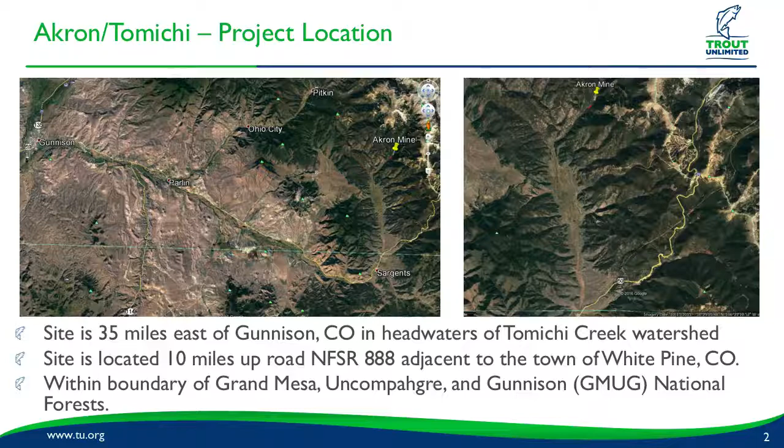A little bit zoomed in version of the site. Again, if you're familiar with Highway 50 flowing here, we have Monarch ski area, so as the bird flies, the Akron mine is not too far over the divide from Monarch ski area. It's about 10 miles up Forest Service Road 888 and adjacent to the town of White Pine, Colorado. And then it's within the boundaries of the Grand Mesa, Uncompahgre, and Gunnison, or the GMUG National Forest.

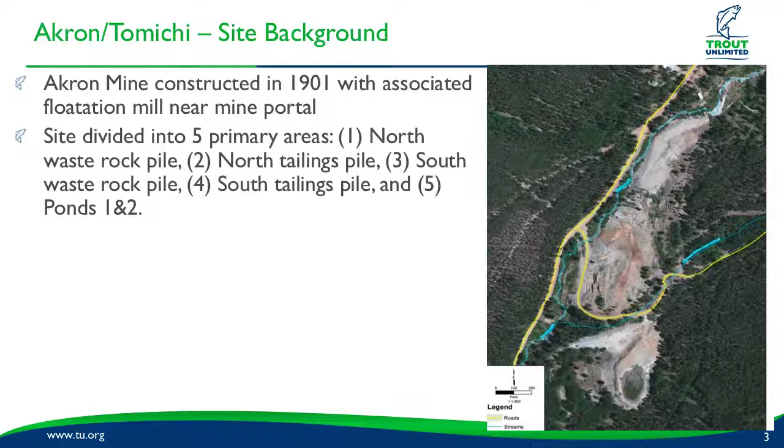So some site background. The mine was constructed in 1901. It was associated with a flotation mill on site. And you're going to see this photo again, but just to kind of orient you to the site, this is a before photo of the north pile here. And the site's divided into 5 primary areas. And we're going to focus just this talk on the north pile, the waste rock pile, and the associated tailings pile. And with this site, our primary threats were exposures to lead, zinc, cadmium, copper, other heavy metals.

And this is kind of some of the lead tailings we were dealing with, and it has the consistency of about like cake. You could cut it with a knife almost. And what we were doing was we were able to prioritize and characterize which areas of tailings and waste rock were contributing more heavy metals by having an X-ray fluorescent meter in the field, so we could prioritize which had higher quantities of those metals.

And our main, like I said, main threats were threats to sources of surface and groundwater. Possibility of mass slope failure, and this was performed by a USGS study before the engineering evaluation and cost analyses was done in 2008, and showed that some of these really steep slopes you guys will see had the possibility of falling into Tomichi Creek.

And then off-site migration of these materials through those surface and groundwater pathways, as well as through the air and mobilization of OHV vehicles. And then direct contact to humans and animals. This was a really big site, like a lot of other abandoned mine sites, where you have a lot of people driving OHV vehicles on the tailings, kind of mobilizing them into the air, so we had those threats to the local community.

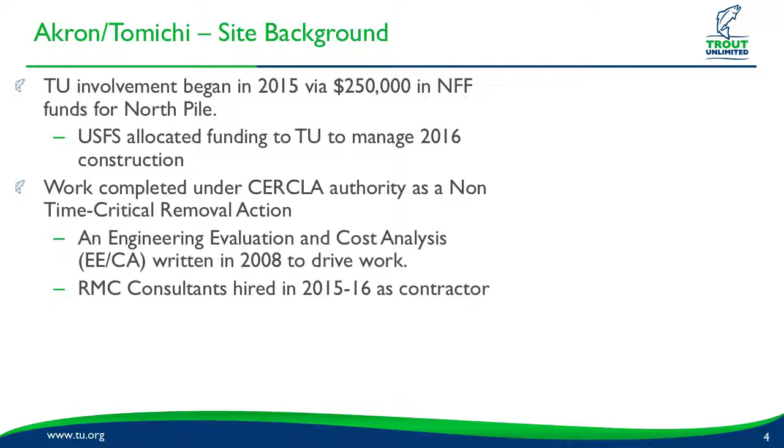RMC Consultants was hired as the contractor. They were already on site doing south pile work, and we had them as our north pile contractor for work in 2015 and 2016. And again, like I said, mass slope failure is kind of a possibility here.

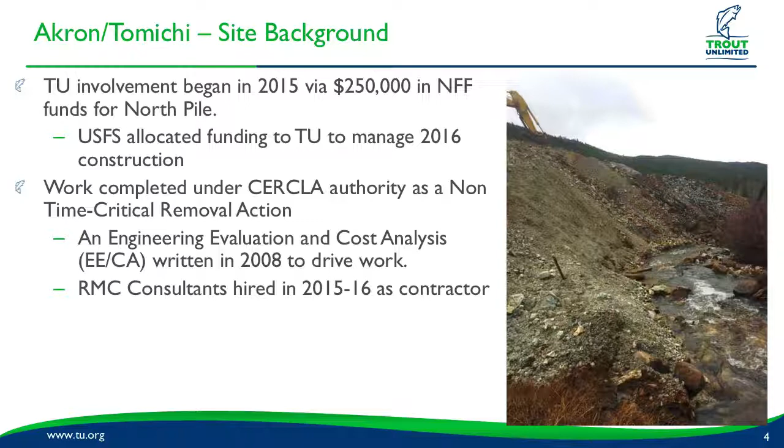This is the elephant in the room we were dealing with, the pre-project conditions, and these mine waste piles ranged from about 40 to 60 foot in height and ran for 1,100 feet along Tomichi Creek, so we didn't really have an accessible floodplain throughout the whole reach. Again, looking downslope, river left, we had no floodplain for the whole entire reach, and this was a mixture of waste rock and tailings throughout.

And the real goal for this project was to kind of minimize this big non-point source pollution, get it consolidated into 2 repositories that I'll talk about here in a little bit, and then create a 60 to 80 foot clean floodplain along that 1,100 foot of Tomichi Creek.

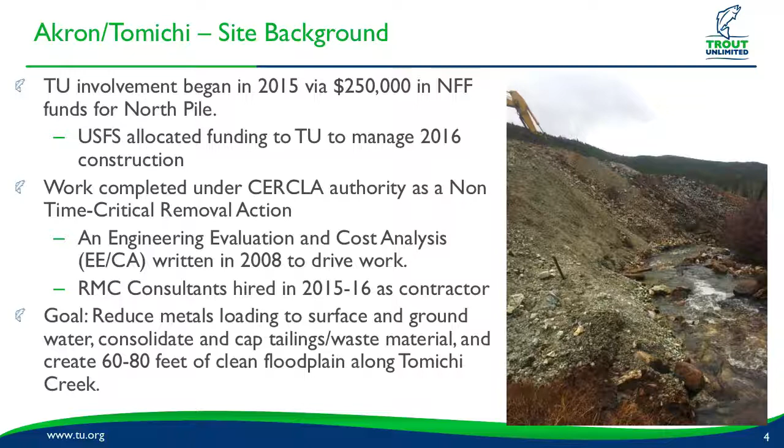And just to kind of start, this project recently was awarded the Forest Service Rocky Mountain Region's Honor Award for sustaining our nation's forests and grasslands. So a lot of our project partners are really happy with the result of this. It was a really big collaborative effort. A lot of themes people are talking about today is collaboration, and without the support of all our partners, this project wouldn't have been able to happen.

Some basic costs. These are just construction alone, not including any project management oversight. We were looking at $190,000 for phase 1 construction, $272,000 for phase 2, for a total of about $462,000 just for construction alone for the project on the north pile.

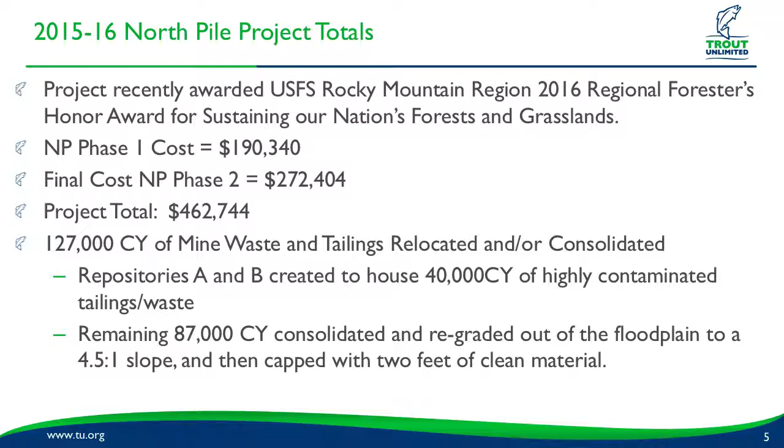The big main goal was consolidating about 127,000 cubic yards of mine waste and mine tailings to 2 large repositories, repositories A and B. And like I said, prioritizing the highly contaminated material was a big part of the project. 40,000 yards of that highly contaminated material was put into 2 repositories, A and B, while the remaining 87,000 yards was graded on top of that to a 4.5 to 1 slope, allowing us that accessible floodplain that I was previously talking about.

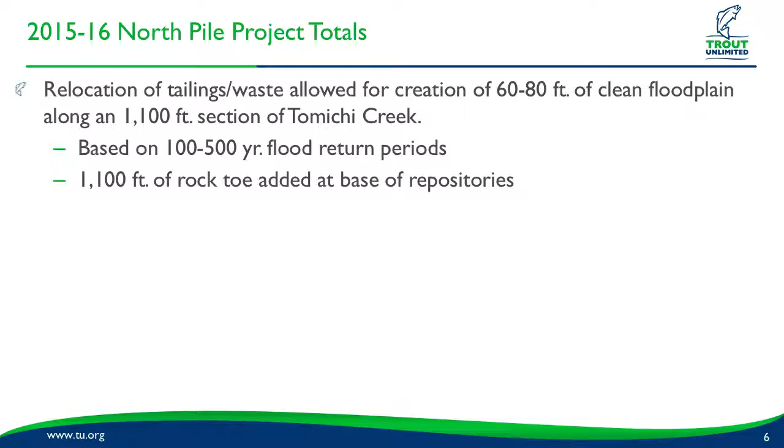And that floodplain development, throwing around that 60 to 80 foot width, was based on 100 to 500 year flood intervals that were done in that EE/CA and the subsequent 30% design that we went into the field with. And to help bolster the toe of that repository, we created about 1,100 feet of a rock toe at the base of the repository to help stabilize it, protect it from really big overbank events, and act as our line of demarcation for the repositories.

We transplanted over 150 willow bulb transplants, and what I mean by that is taking the whole excavator bucket and digging up the entire living willow. So I was able to go down and flag 150 of these in the site, and the contractor would pick them up and put them in individual locations along the floodplain, and this helps with immediate stability in your floodplain as well as root development, not having to wait for your willow cuttings to develop over several years. So this is just immediate willow stability.

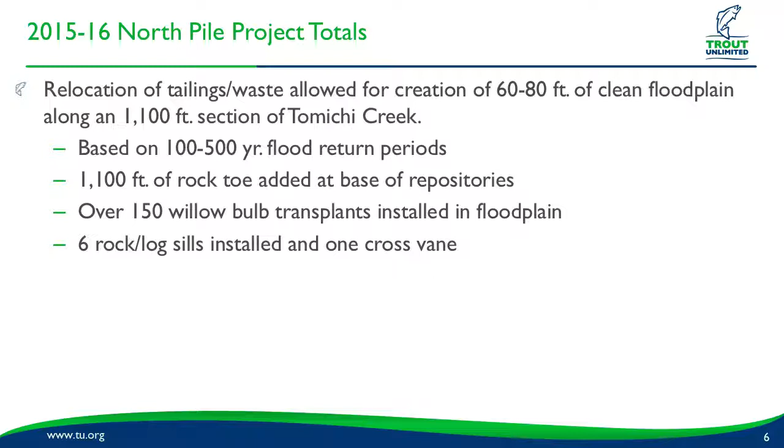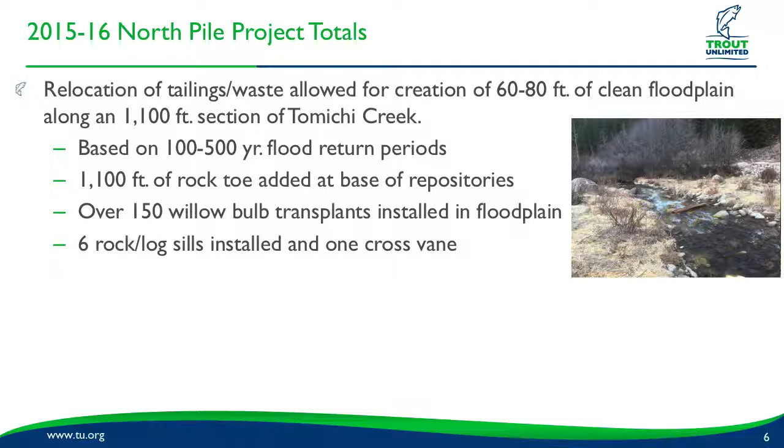6 rock or log sills were installed along the floodplain for that 1,100 feet to help stabilize that unconsolidated fresh material we just put down. And then there was a reconnection part of this project too. We had a really big culvert that used to actually be the boiler stack on site. That was where the Forest Service road was going along, so we did have a little bit of a fish passage issue there. So after photos, we were able to remove that culvert, reroute the road, put a bottomless culvert in, and then there's actually a cross vane in here you can't really see, right about here, to help us maintain and hold that grade where the culvert used to be, and provide a fish habitat feature as well.

We rerouted the Akron Adit flow, so we have a perennially flowing adit here on site as well. And we created an actual channel to route it down into Tomichi Creek. The water quality of the Akron Adit is actually pretty good because of the underlying strata that we have here. And what we wanted to do in the wake of Gold King was give a clean path for the Akron Adit to flow, so we weren't going to mobilize a bunch of tailings down into Tomichi Creek in the event of a blowout. So we had a clean route in between our 2 repositories, on clean material with the channel set in. So this is a really big part of the project.

After completion, we planted 196 riparian plugs to give us some species diversity along the floodplain. And then 13 acres of seed was applied in combination with Biosol, 600 yards of locally sourced manure from the watershed, the Cross and Bar Ranch, and then 200 yards of compost.

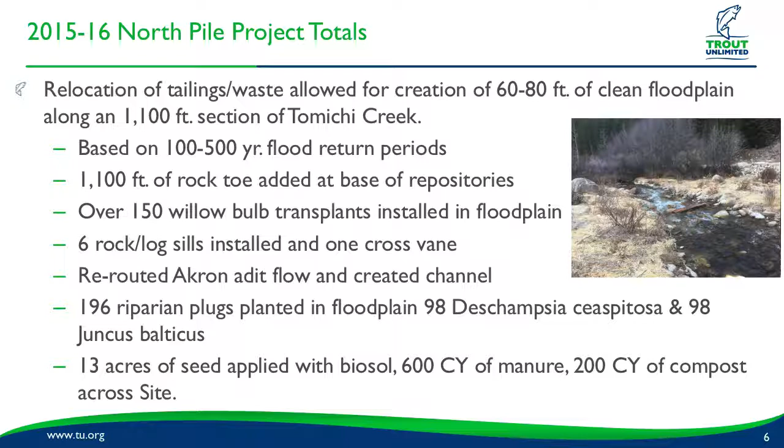This is an as-built drawing. As I mentioned, we had repository B here. It was kind of divided into 4 cells, you can't really see, and then repository A, and then you can see the Akron Adit channel comes here down into Tomichi Creek. So again, we're not going to be taking any contaminated material with us in the event of a blowout. It actually used to go up above here in a ditch that we removed and then routed down here. And then here's our rock line toe and our floodplain.

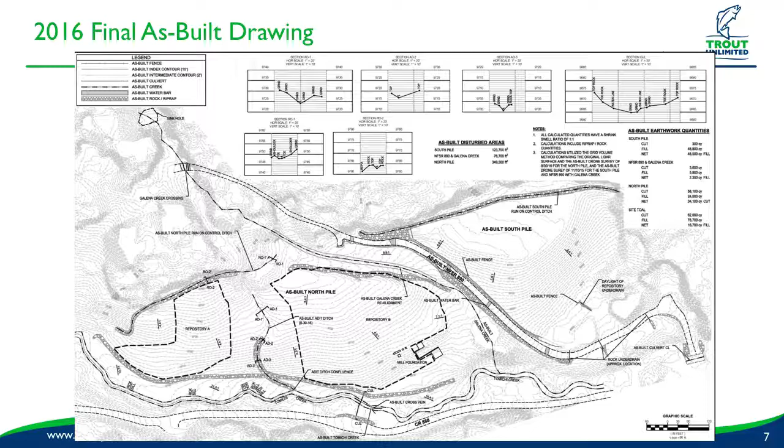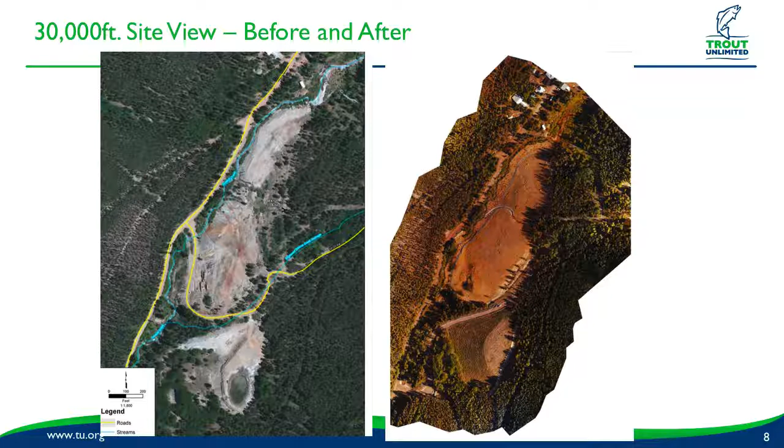So we have our before photo you guys already saw, and then our after photo. This is an aerial drone that we flew in September right after completion of the project. Again, our Akron Adit channel coming down here between repositories A and B. Here's our rock line toe at the base of the repository. And then you can see this pretty concentric floodplain that we have along this whole reach along the north pile that we were able to create.

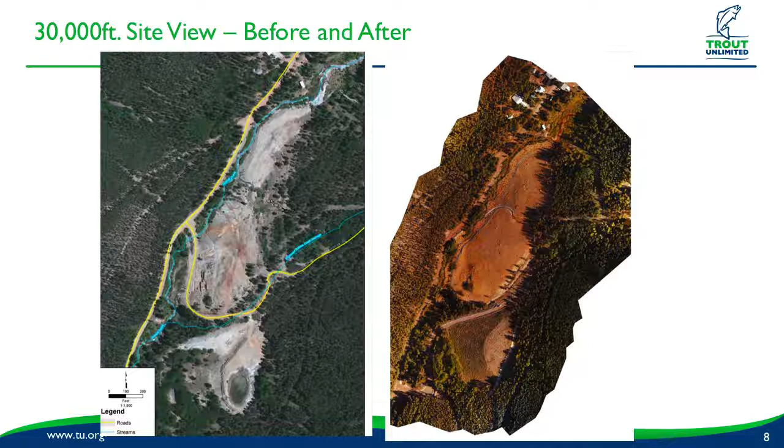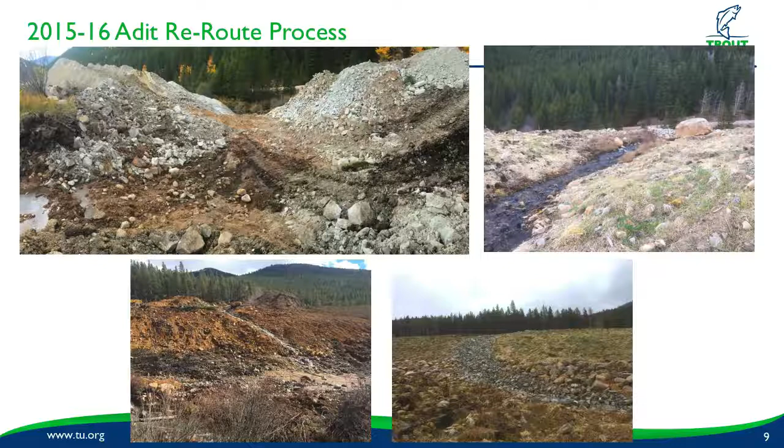The reroute process I mentioned for the Adit, it was kind of a parting of the seas, so to speak, in the beginning. And you can reference the road here as the consistent point between the two photos, routing it down between the two. This is during construction in 2015, right after we turned the water down slope. And then here's afterwards, this past October, after we had our vegetation come up about 6 weeks after project completion.

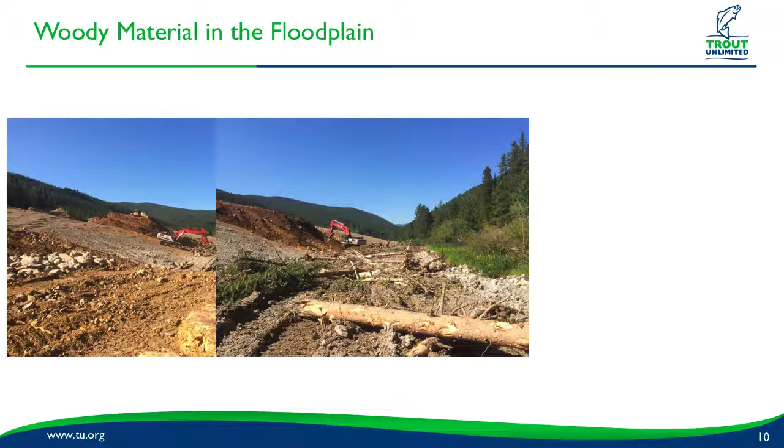Woody material in the floodplain, this is kind of big for us. What we do is we set our grade for the floodplain, come in with locally sourced material. We had kind of an unlimited supply of lodgepole on site. I'd have the contractor scatter these about, track over it with an excavator, give us our roughness, help lock in that unconsolidated material. And then we'd come back in afterwards and kind of mess it all up with the bucket. We would knuckle it in and kind of do a hummocking technique.

And what this would do is create little pockets of water in micro-communities. So it would help give us moisture for the vegetation that we just put in, as well as help dissipate our flood flows. Whenever we get overbank flows, it helps slow those velocities, as opposed to a flat floodplain that you'd normally see. And then you can see that our willows that are every 5 to 10 feet are helping lock everything in.

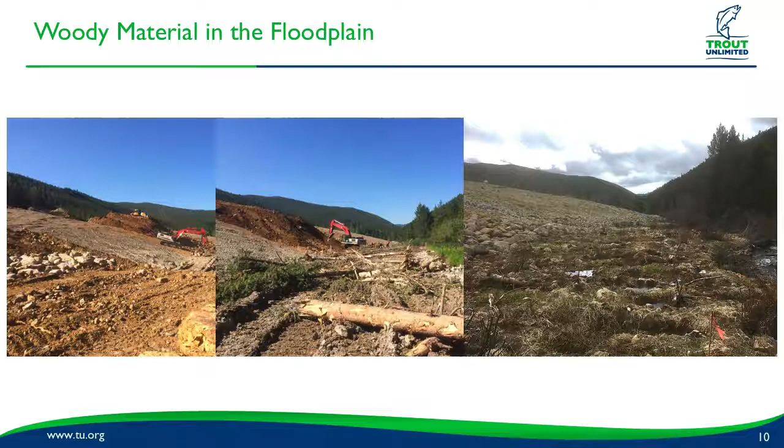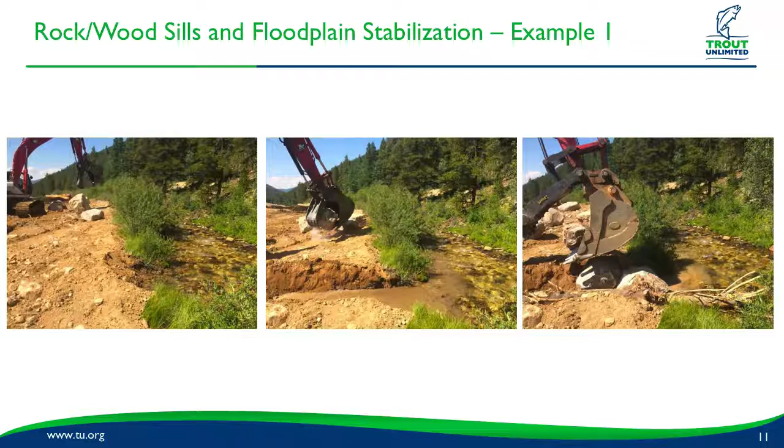I mentioned rock and wood sills that we were using. This would help the floodplain from unraveling during overbank events. We place these periodically along the floodplain, and we'd come in and dig an excavation about a bucket's width, 6 to 8 feet back into the floodplain. And we put large rock, which we were able to harvest on site, about 3 to 6 foot boulders. And sometimes we put trees out to break up the monotonous riffles that we had throughout the reach, to give us some habitat and break up that flow.

Set that back at our floodplain grade, backfill it, and then transplant some willows for immediate root stability, so those roots will grow in between all the logs and the rock and help lock everything in.

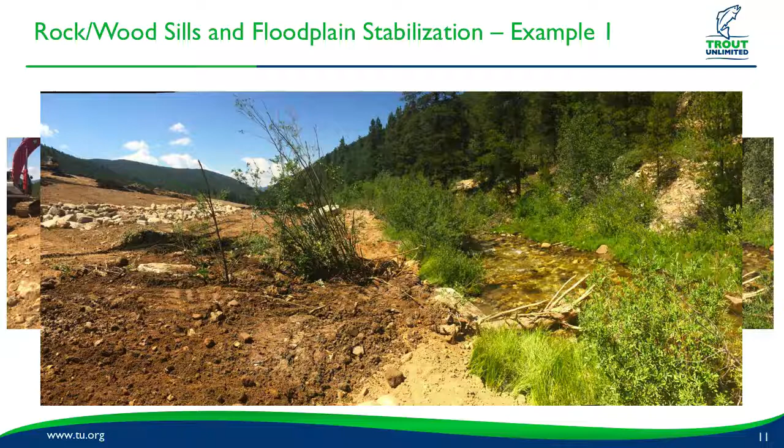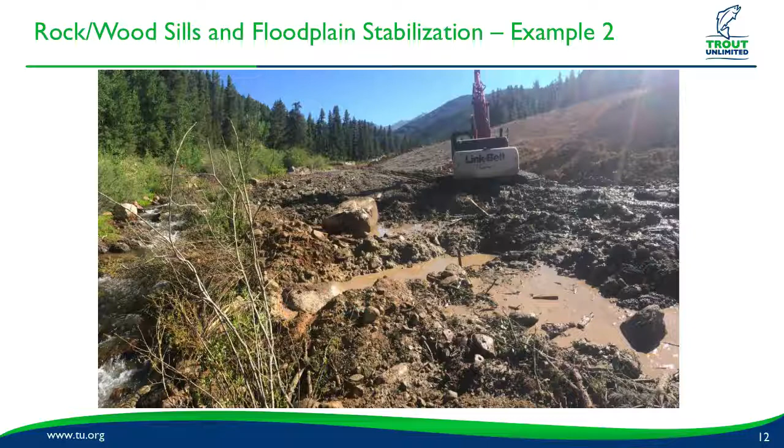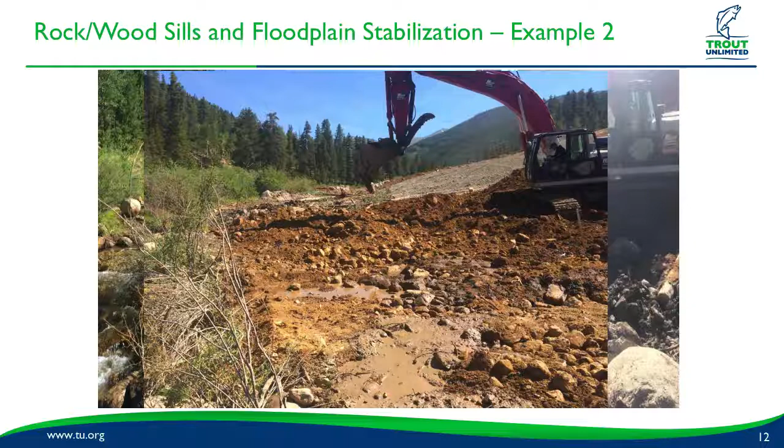Another example, kind of a big thing too, is making sure we set our first rock at the bankfull elevation, and then stacking those rocks up as we go back at that elevation of the floodplain. And we did add some other lodgepoles in here, and then backfill on top of it. So again, these are placed periodically through the floodplain. This one in particular is on a bend. So if that did jump the bend, we have a stabilization or a sill structure there.

So some before and after photos. Like I mentioned, the elephant in the room before we started construction, 40 to 60 foot tall mine waste piles. This is after we buttoned up in 2015, after the first phase of North Pile work. And then 6 weeks after construction this October. If you look closely, you can see some green up here. We had vegetation about 6 inches, 6 weeks after demobilizing from the site. So we had really good veg growth across the site.

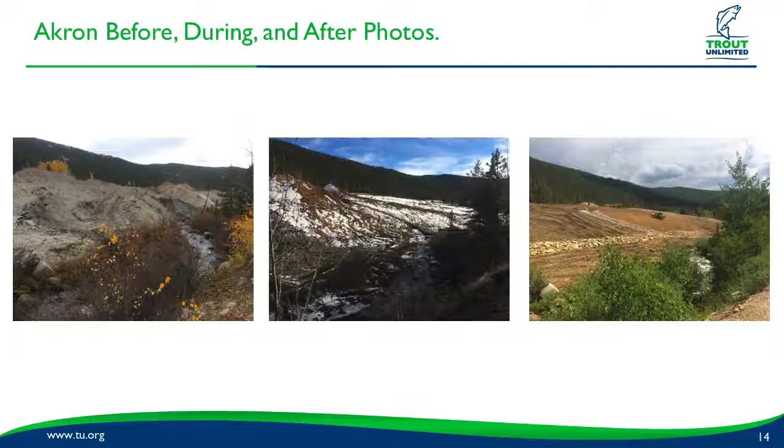Again, looking down, this is on the roadside, looking down Tomichi Creek. This is before, after we demobilized in 2015. And one thing to point out, we were able to do repository A in 2015 and then finish the site, repository B and all other final grading in 2016. This is getting the site all nice and pretty and graded before we roughed it all up.

And then this is right after construction. And then this is 6 weeks after. So if you could go back to that other photo, go back one, and then go back again. So again, we had that really good vegetation just 6 weeks after project completion. So we were really happy with what we had in that amount of time, and just looking forward to getting everything greened up for this year as well.

So some future steps, operation and maintenance, obviously for a site of this size. We're going to do some weed mitigation this year. We've had development of oxeye daisies, kind of encroaching from the road that we're going to have to deal with, as well as some other invasives. And then do some more willow cutting and planting where we might need some on the bank. Vegetation monitoring and any reseeding if necessary if some sites aren't coming back as strong as others.

DRMS is going to hopefully install a flume out there to help us monitor the fluctuations in that adit flow right above that channel that we put in. And then some continual post-project monitoring will take place this year. We will do some water quality monitoring. We will do some fish shocking.

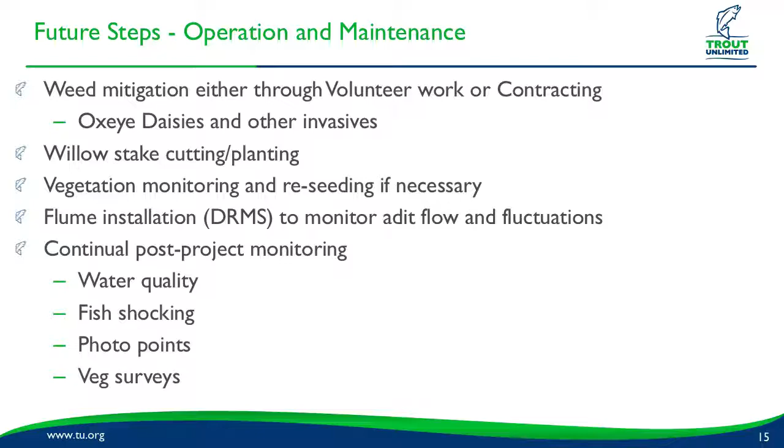So we were able to duplicate a fish shocking study that was done in 2014, evaluate taking out that culvert, evaluate the improvement of getting that mine waste up out of that floodplain and continually loading into the creek. And photo points, and then continually doing some veg surveys and veg monitoring along the site. So I'd like to open up to any questions or comments, and thank you guys again for having me.

In that reestablishment period, did you have regular rain, normal rain? It was probably pretty normal. Oh, yeah, I'm sorry. So the question was, for that 6 weeks post project completion, what was our precipitation like during that time? And White Pine, that's kind of its own little rain cell. They get a lot of snow on that west side of Monarch Pass, and they do get a lot of summer thunderstorms, but I don't think it was anything abnormal. We didn't have significant erosion or anything. It was just normal precipitation. I'd say average.

How did you stabilize the waste before you started? We did do BMPs, but we picked away at it very slowly. We knocked back those slopes. We did have silt fences in the bottom. We had wattles that we were using throughout to minimize the amount of material that might get pushed into the stream. And then each cell was constructed separately. So we characterized the most contaminated material and put it in the cell. And once that was covered up, we dig another one. So we were doing it incrementally.